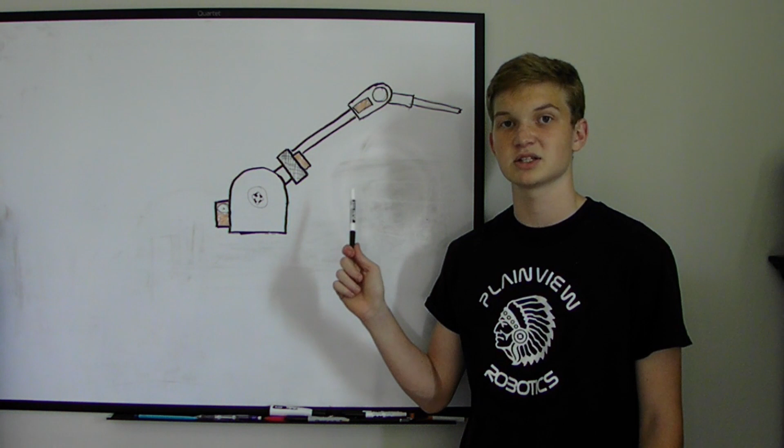Here's a quick sketch of what I worked on last episode, if you want to go see that. I'll probably leave a link to the last episode in the description. So this week we're going to be working on the base.

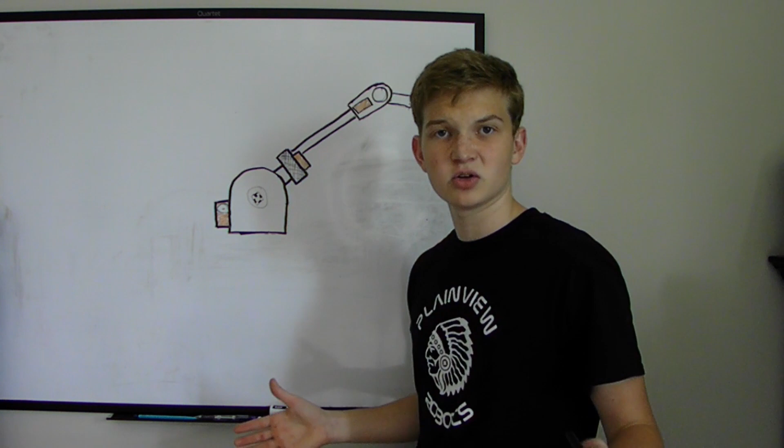The base is going to be mounted to the shoulder right here, giving us another axis of rotation that will rotate the entire robot. I'll sketch it out so it's easier to understand my thinking process. This right here is the rotating plate, which is what the shoulder is going to be attached to. This rotating plate is going to be set into the base, and this is the piece that's actually going to be rotating with the arm, while the rest of the base will be stationary.

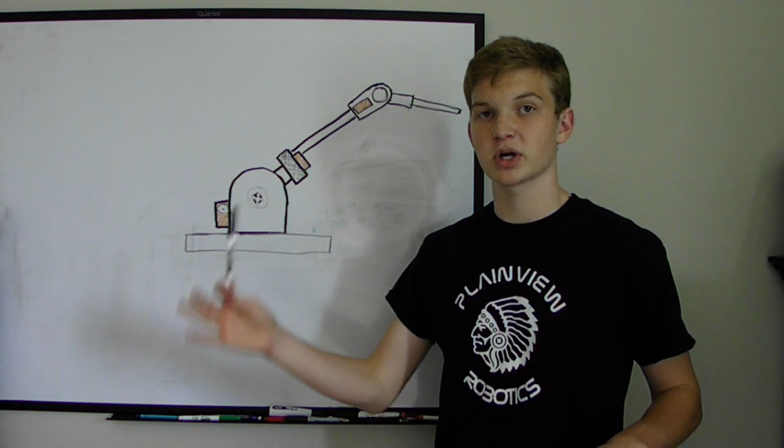One of the criteria I have for the rotation on this base is for it to be able to rotate in either direction as long as it wants. This means I'll only be able to put electronics, such as the Arduino, the servos, all the driver boards, everything like that, on the rotating plate with the rest of the robot arm.

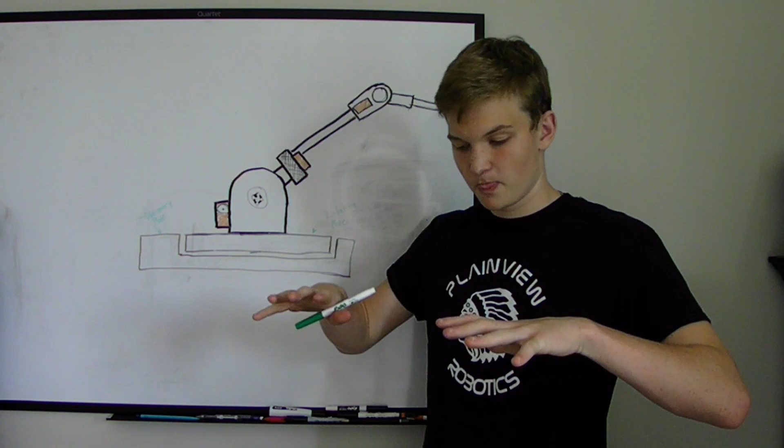This right here is the stationary plate. This is what's going to be actually sitting on the table, solidly set in place. The stationary plate will probably have a pivot point coming up through the center that connects to the rotating plate to help it spin.

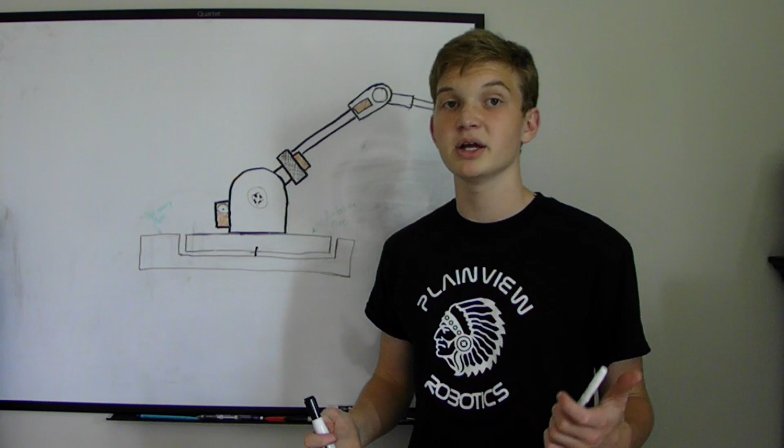Now, like I said earlier, I wanted to put all electronics and components on the rotating plate, but I obviously have to have some type of power cable that connects from the robot to a wall outlet, so I will have to have at least one cable external from the rotating plate.

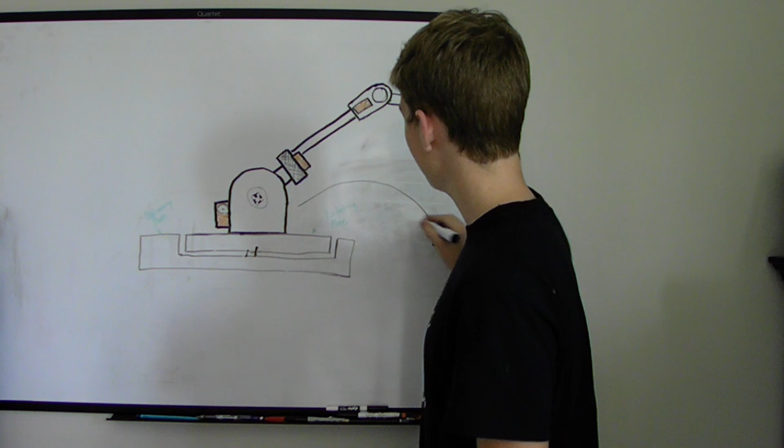We can't fully solve this problem, but we can reduce its effects. So instead of having an external cable for the power come in and attach to the robot from the top like this, we can actually make our pivot point hollow and have the cable come up through the pivot point into the rest of the robot.

This way, it won't actually be twisted around the base over and over again, but it will be slightly twisted over and over again at the bottom. It won't mess anything else up, it'll just twist the cable.

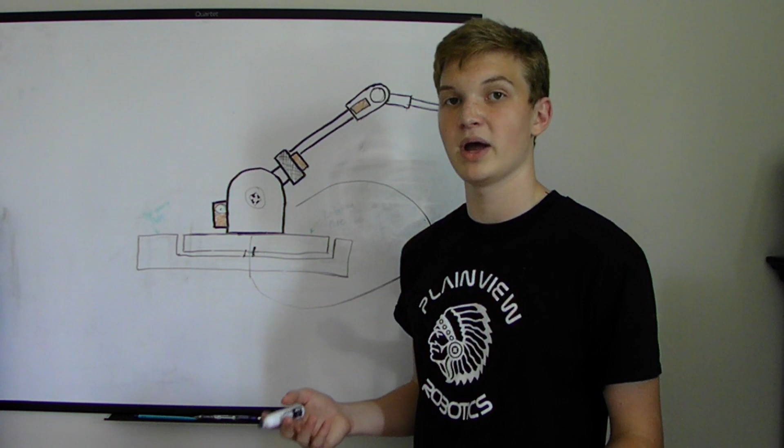This won't cause the robot to malfunction. It will cause the cable to maybe break at some point, but I'm going to be programming this robot in a way where I'm not just turning over and over again in one direction. I'm going to be turning back and forth, so it shouldn't be an issue.

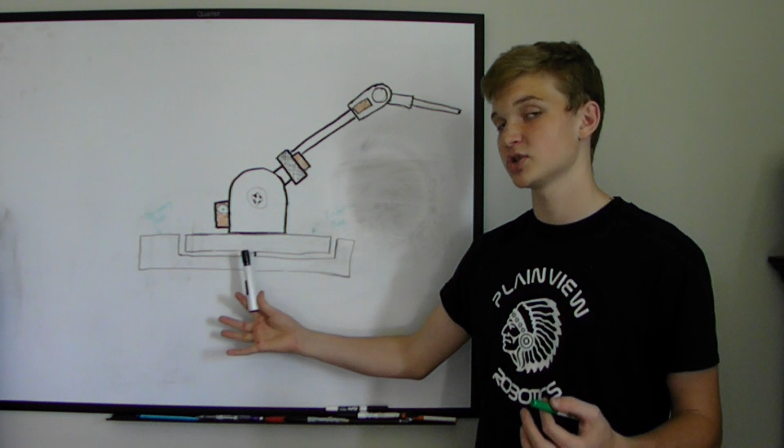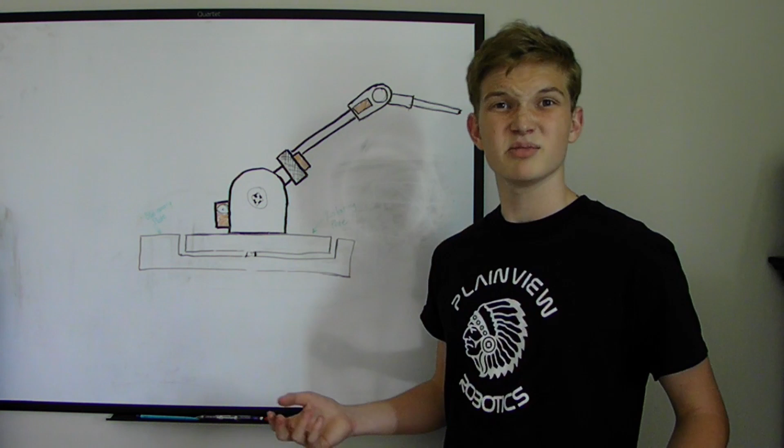Now, the reason I'm at a whiteboard drawing all this out is because I'm about to explain the two methods I've come up with to try to drive this rotation plate with a servo, to be able to rotate to any degree we specify. Obviously, there are other methods of getting this rotation plate to work, but these are the two main ones that I came up with. If anybody else has any other methods, feel free to leave them in the comment section and I will read through all of them.

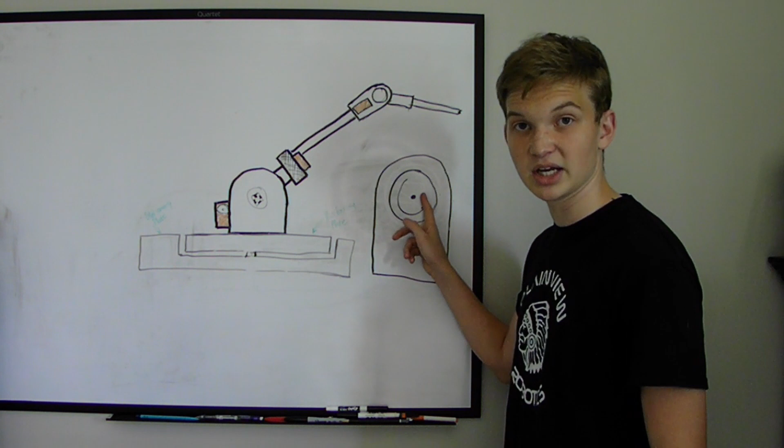So this is the top view of the base - this is the stationary plate and this is the rotating plate. The first method I came up with was to add a drive servo somewhere on the edge of the rotation plate, in this location. Then, on the end of that drive servo, add a small gear out at the end that passes the rotation plate. Then, in the stationary plate, we have an inset like this that fits the rotation plate.

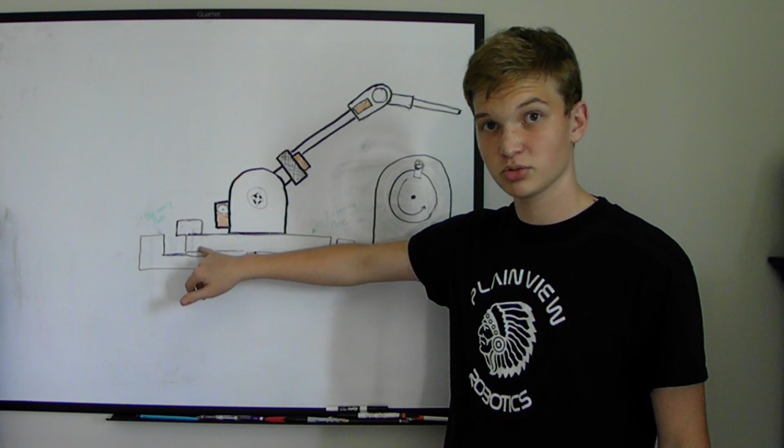This is the side view of how that motor would be attached. Technically it's an unlocked servo, so it becomes more like a motor. This motor or servo would be connected to the rotation plate like this, overhanging on the edge of the stationary plate. This servo would have a gear coming off of it, and it would be interlocking with the inset of the stationary plate.

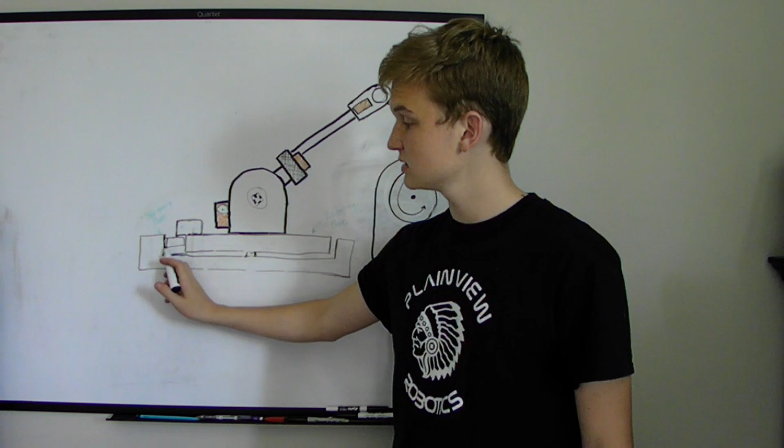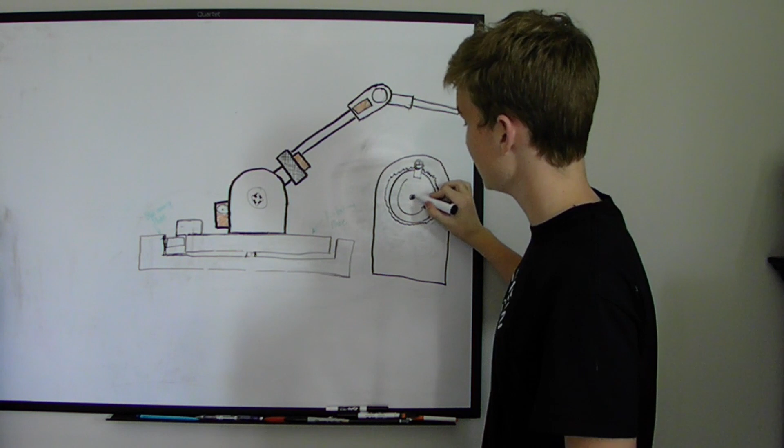Now, the stationary plate would have an inverse gear - these are great gear drawings, by the way, basically just a squiggly line. Anyways, it would have a gear right there, inset and touching with gears all the way around. So when it spun, it would rotate from the point and lock in with the gears all the way around the edge. That would be one way to do it.

Now, the second way to do it would be to have the gear below the base. So the rotation plate actually pivots right here, and this gear is a part of the base.

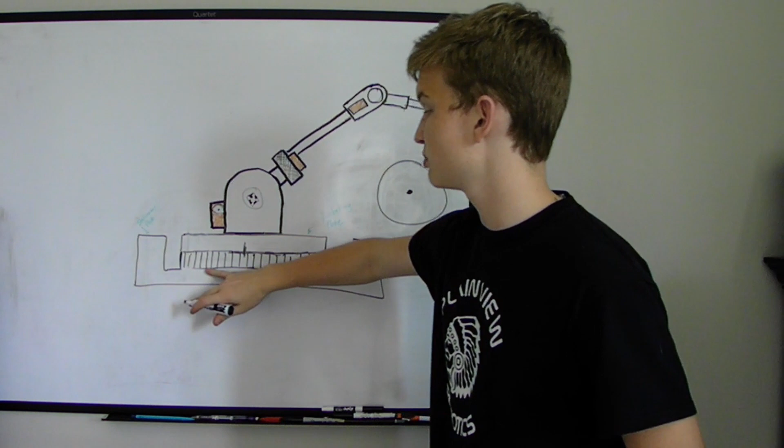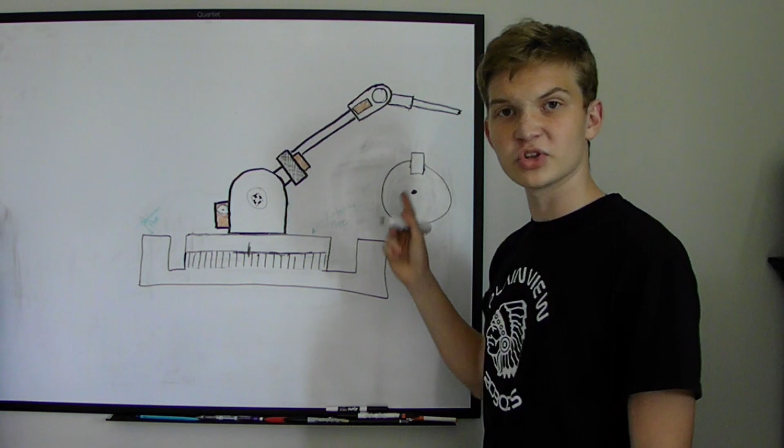For this design, you would have to have a notch cut out of the rotation plate, with the servo still slightly sticking out to the side. This is how the servo would fit into the side, inset into the base, with gears coming off of it on the outside. So when it spins the gear, it interlocks with this big gear that's connected to the rotation plate, not the base, so it pivots around this point.

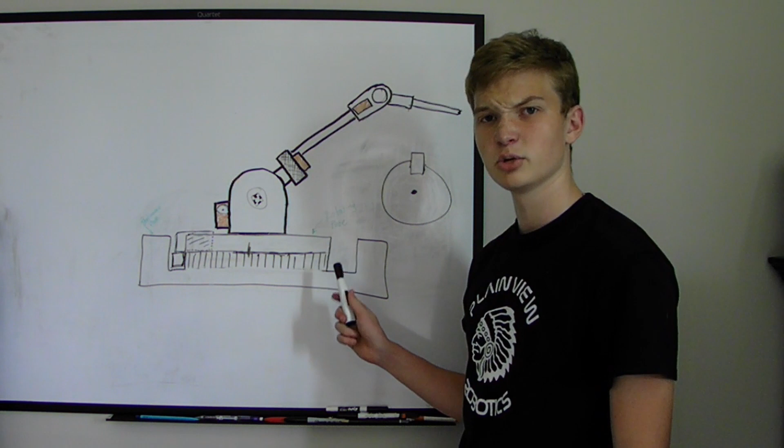I do think I like this design a little bit more because it looks cleaner, but let's look at the pros and cons of both of them before I make a decision.

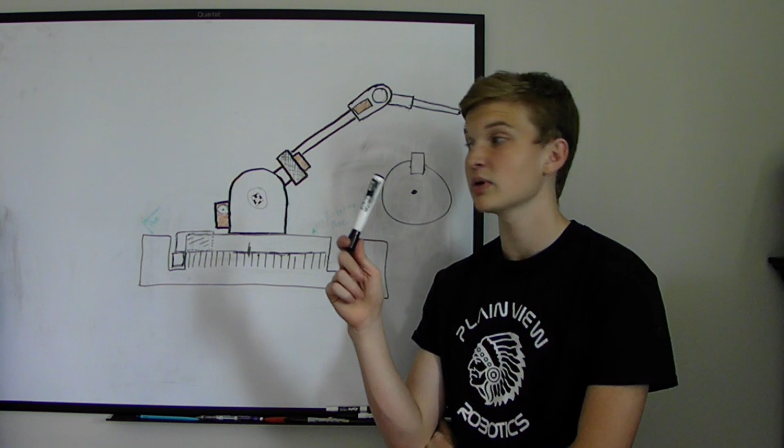It may not be a problem, but the main issue I'm thinking about for both designs is the build volume of my printer. The base has to be rather large because it's going to be much bigger than the shoulder and also fit all the components, so it's going to have to be very wide, and I don't know if I can fit that all on my 3D printer.

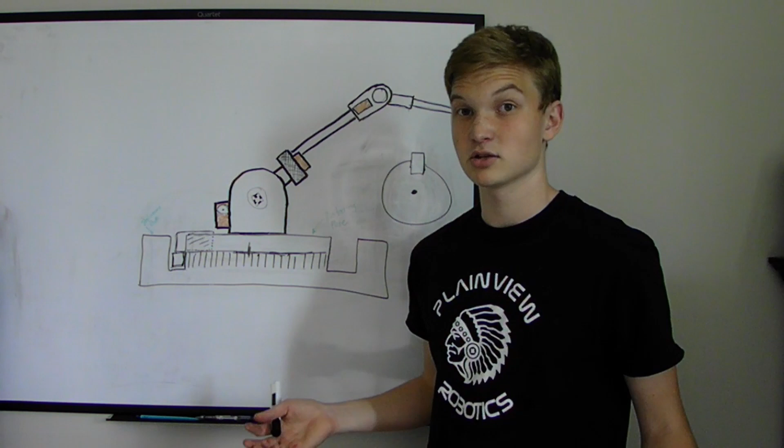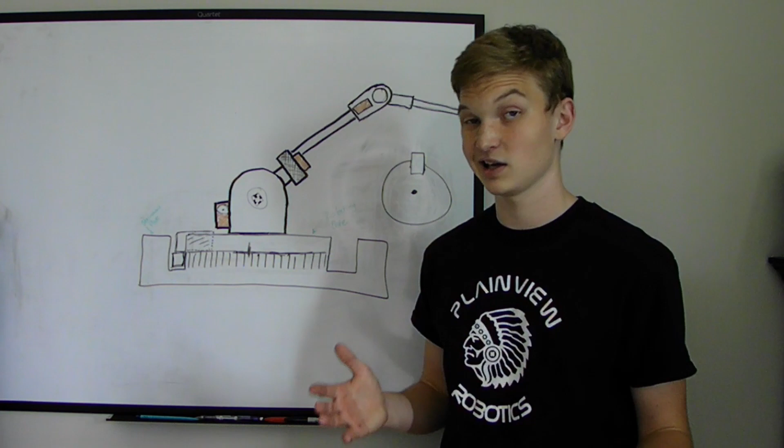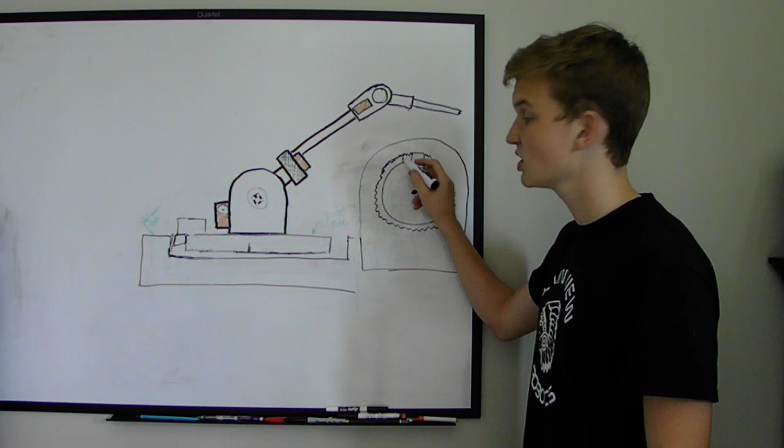What's good about this design is I know that this distance will probably fit on my build plate and will be acceptable, and I can print it in one part. But the problem with the other design, the one with the teeth on the inside in the base like an inverse gear, is I don't think that width would fit on my printer.

Even if it did, it'd be a rather weird shape. This whole piece would obviously be way too big to fit on my printer bed, and I don't even know if I want to waste that much material trying to make a base. Plus, it wouldn't be heavy enough, it wouldn't be stable. The base is just something that's not going to be 3D printed—it's going to be made out of wood.

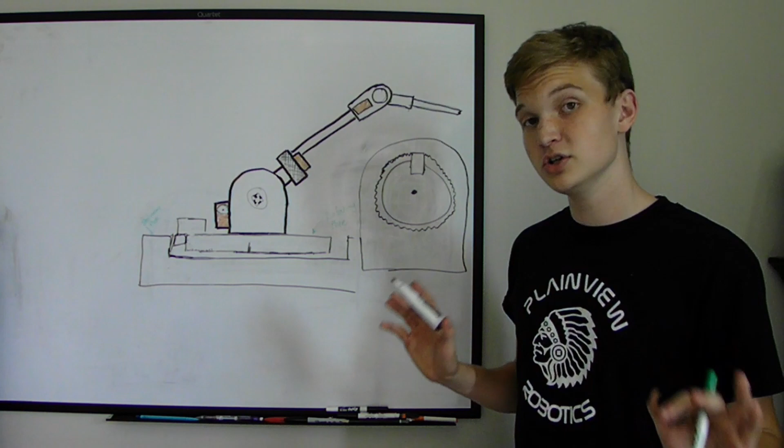But as I said, the gears have to be 3D printed. So what I would have to do is make a thin little almost washer. This piece, the part I colored orange, would be the only part that could be 3D printed. All of this would have to be wood, and I'd have to 3D print this orange ring part and place it into the wood.

This is what that orange part would look like from the side. It's a very thin, small sliver that has to go all the way around. Now, could I get this to work?

Yes, but another thing is printing a washer like this on my 3D printer might be too big, so I would have to split it up into sections—maybe three sections. Print this piece, then print this piece, all of those little orange pieces. That would make the gears not lock together as well, since the seams between the two wouldn't match up properly at some point, and it might cause the gears to lock up.

Plus, another thing that hurts this design is the outer ring cut into the wood that the plastic piece would fit into would have to be perfectly circular, because the 3D print would be perfectly circular, but I don't have a router or any tools like that to make a perfect circle in a piece of plywood.

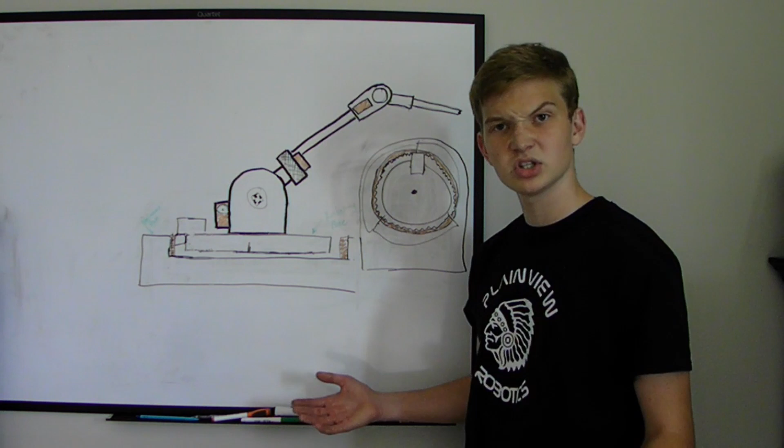So I've decided I'm going to use the second design I talked about, the one with the gear directly below the rotating plate. I hope at least some of this made sense. I'm fixing to whip up the models in CAD so you can see what they look like. Hopefully it'll make more sense.

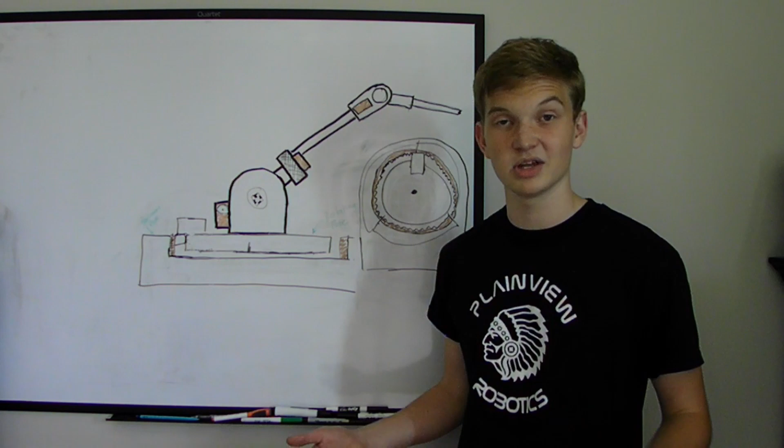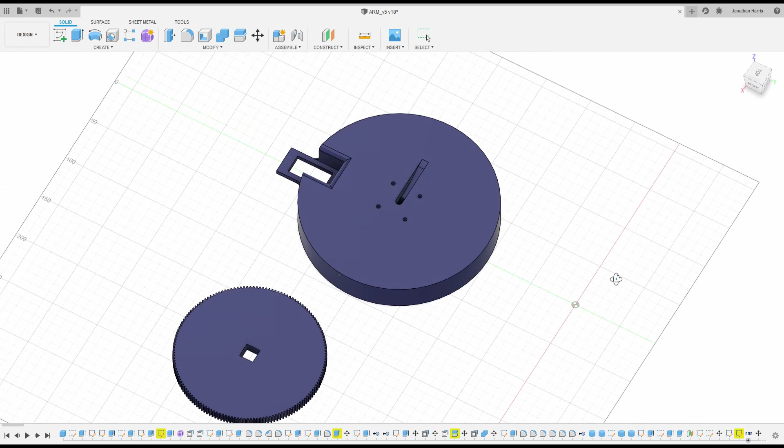Okay, so I've already gone ahead and modeled the rotation plate and stationary gear, but now that I'm looking at it, I can already tell this rotation plate is going to be super impractical to print. It's way too big and bulky, and it's barely going to fit on my printer. Now, obviously I have to print the rotation gear, because I'm not one of those insane dudes that can make super accurate gears out of wood. But this rotation plate is basic and would be super easy to make out of wood, especially since I know exactly what wood to use.

We have a ton of these 3/4 inch plywood shelves left over from the construction of this house that are perfect size for any small projects I'm working on. I like to cut these up and use them because we have nothing else to use them for, and they also have this nice little paint finish that makes them smooth, but if I don't need it, I can just sand it right off.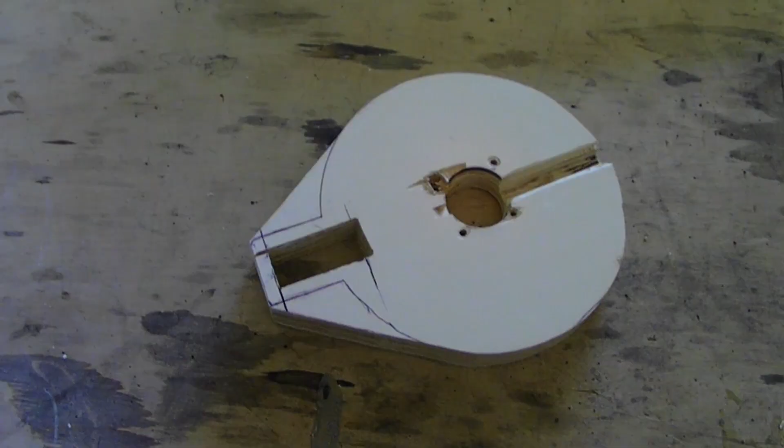Okay, so I literally just made a little wooden circle with the servo mount sticking out on the side and slapped a hole through the middle. That's going to be where a washer goes through and how we're going to pivot. And I have some holes drilled from the bracket. I just took the shoulder bracket off of the base and slapped it on here, marked the holes so I knew where to drill these out, and then I also countersunk these on the other side so those washers are flush.

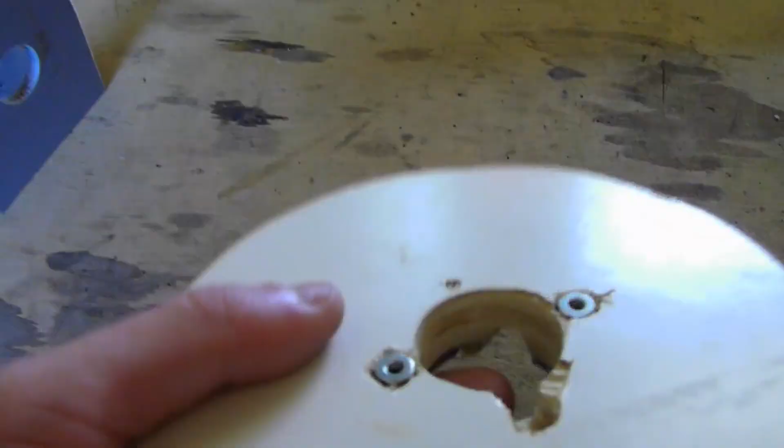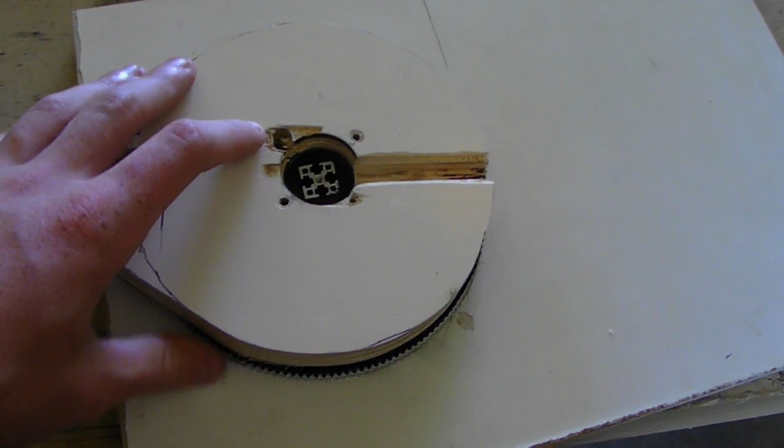Okay, so now that the rotation gear is printed out, you can see it's got a bunch of little teeth on the side. I just used another piece of that shelf, cut a square hole through the middle of it like that, and strung up the gear and a little washer, so when I add this plate here, it spins freely. Along with using this square 15mm aluminum rod, I also use 5-minute epoxy to secure this gear strongly to this plywood right here.

It was at this point that I realized the shop was getting super messy, and it was getting pretty annoying. Since it was a super nice day outside, I decided to clean up the shop.

Okay, so now that I can breathe again, let's take another look at that pivot point. I know I originally said I wanted to try to make that pivot point hollow, but I have a different idea now that I think will be a little bit easier to execute. I still intend to string the power cable through the center, but I'm wondering if I can just fit it through these holes like this.

Now, obviously, these aren't the power cable. These are way too thin and can't carry enough, but it still kind of gives you an idea of what I'm trying to do. That's why I made this gap in the rotation plate with the table saw, so that I can fit the power cable through here and then plug it into the Arduino up here somewhere.

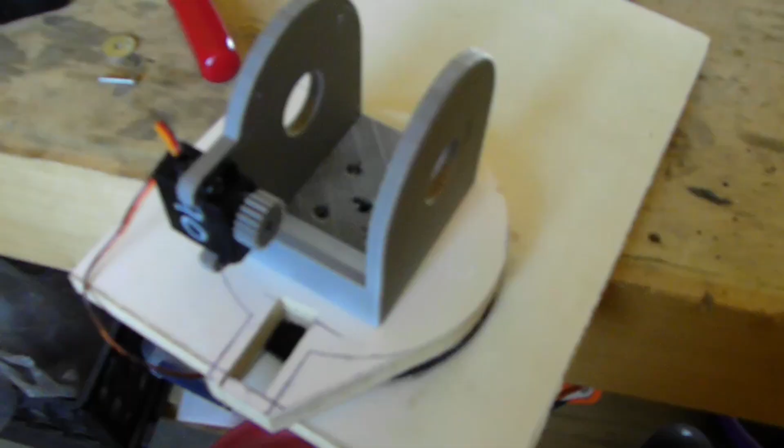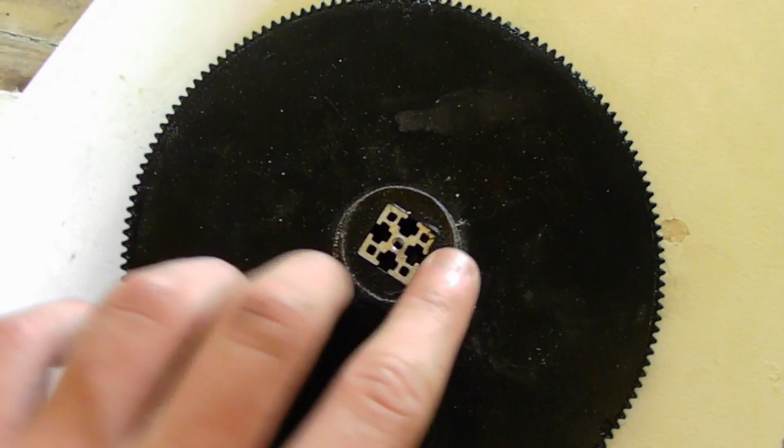So now I have everything built and everything's already made. I want to put it all together and make sure everything works. Another thing I forgot to mention is to make sure this plate doesn't just lift straight up off the pivot point. I'm going to use one of these screws with a washer and string it straight through the middle of this crappy hole that I made, because I threaded the top of this aluminum rod to fit one of these, so I can just drill that through straight through the top.

I was expecting the servo shield I ordered to come in this week, but unfortunately, since it came from China, there were some complications while getting the package here, and it didn't arrive in time for this video. So I'm testing the servos individually, one by one on the Arduino, because I still don't have the shield to split it and be able to control them all at once.

Even though I already tested all the shoulder and elbow joints, I'm still going to test them again. I have had too many servos give out on me in a competition to not want to constantly check.

Alright, that is most of the base done, and I'm pretty happy with how it turned out. Even though there are a couple little things that I see that could be changed, it's nothing major that demands immediate attention or something drastic like a redesign.

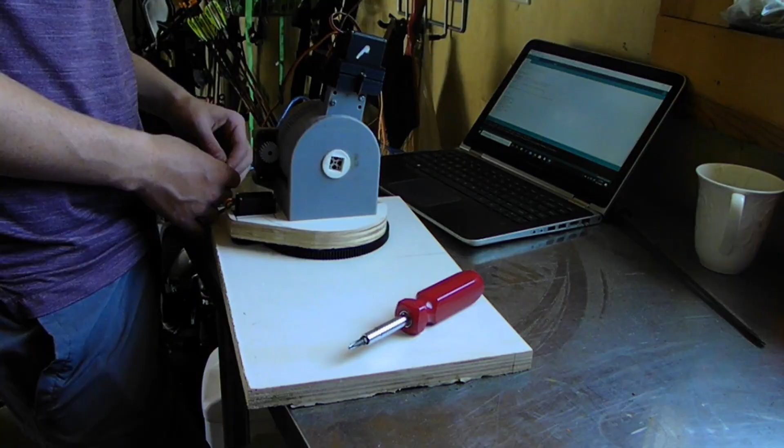I think the next episode is going to be making all of the wrist and hand joints on the end of the arm. If anyone has any suggestions on how I should improve the base or go about building the wrist and claw system, I would love to hear them. I hope you enjoyed this episode, and I'll see you in the next one.